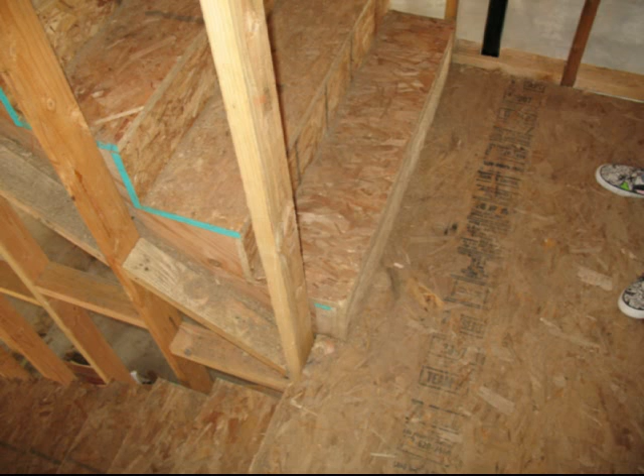Here's a common problem. I've seen it quite often and have a simple solution for it. This video, I think, would be geared more towards professionals, someone who's working in the construction industry, building stairs on a regular basis, but can apply to practically everyone building stairs.

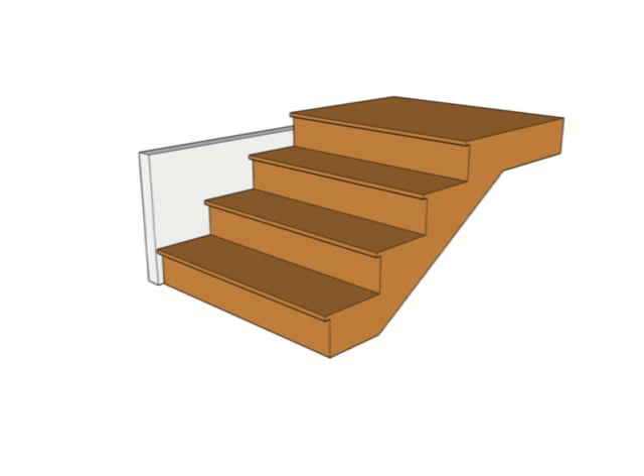Now, the common problem is that the stair nosing actually will protrude past the wall because the stairway wasn't laid out properly. Now I've got an easy solution for it. If you want the stair tread nosing to be behind the wall instead of projecting forward from the wall, then all you need to do is actually move the stairway back the distance of the stair tread nosing and the width of the stair tread riser.

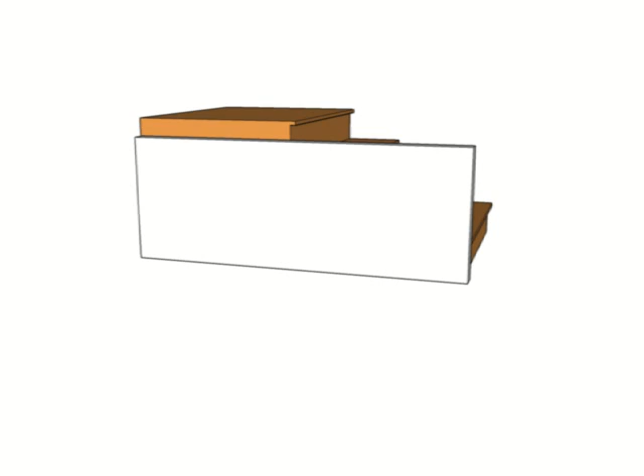So for example, if you have a 3/4 inch plywood riser and a 1 inch overhang, then all you need to do is move the stairway back 1 3/4 inches while you're laying out the header, the walls, wherever the stair stringer is actually going to attach to. Now let me see if I can make a little more sense out of this. I went ahead and drew a little floor plan right next to the stairway, and I raised the wall up a little bit to give you an idea.

Now this is if you were to lay out your stairs on a floor. You've got a floor plan, and usually this is what the floor plan will actually look like. It'll give you the width of the treads, 11 inches, and the width of the landing, for example, but it's not going to provide you with the setback that you need. And I cannot tell you how many times a carpenter who's laying out a stairway with 3 treads that are 11 inches simply measures 33 inches from the front of the wall, and that's where they place their other wall that is going to support the landing and the stringer.

Now, all I'm suggesting, and it's simple, is to move the stairway back. Move that wall that's going to carry the landing. Move it back 1.5 inches, 1 3/4, whatever the distance is going to be, and solve this problem. Quit having these stringers and these nosings sticking out past the walls. And again, this is a common problem.

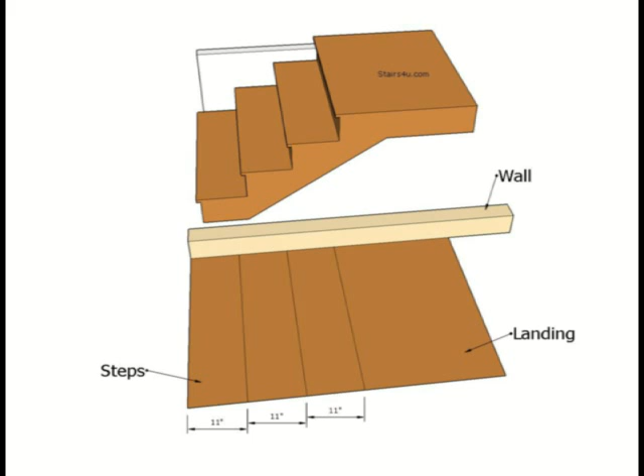You'll have a 36-inch hallway. The builder makes it 36 inches. They don't allow for any drywall. The hallway's already 35 inches wide. And then they have a stair tread nosing and the carpeting going around the stair tread, which gives you another 1/2 inch to 3/4 inch sticking into this thing, and no one ever says anything. So is it a big deal? Well, it could be. Now here's another picture where I moved it back, and again, there's the distance. Overhang plus riser width is the distance you're looking for.

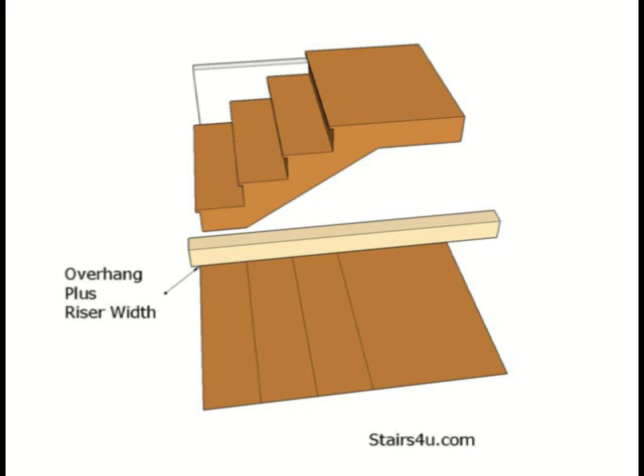Now again, you can take this thing a little bit farther. You can allow for the thickness of the drywall and the thickness of the material that is going to cover the stairway. And don't forget, let's just say you have oak stair treads and they're going to have a nosing on it, then you're going to need to allow for the nosing while you're designing and framing the building or the stairway.

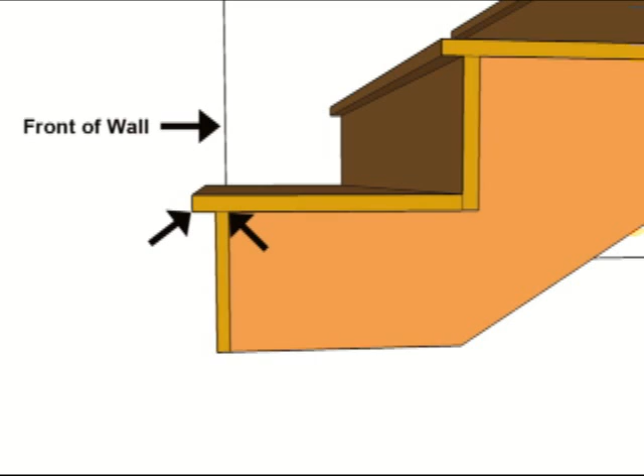And here's another example to give you a better idea what I'm talking about. If the front of the wall is the line there, and the stair treads, if you just lay it out normally, you just go back 3 treads, 33 inches, you build your wall without allowing for the width of the riser or the nosing. And don't forget, the nosing is the distance from the front of the tread to the front of the riser.

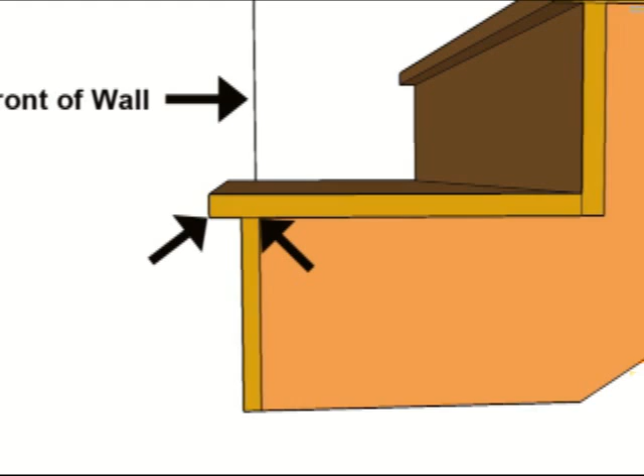So in this case right here, like I said, we've got a 1-inch nosing, 3/4 inch wide stair riser, 3/4 inch plywood, 3/4 inch wide OSB, and it would actually project past the wall 1 3/4 inches if you do not move the header or the supporting wall for any landings back. So anyway, that's it.